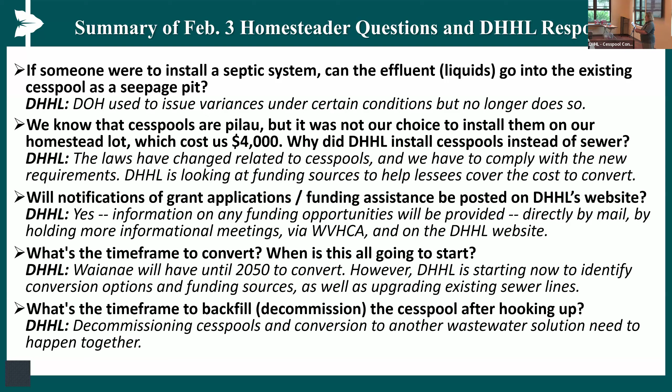So let's go to the next slide. There were some questions about process. We are going to try to get you that information, but we intend to manage the entire process so you folks don't have to deal with it individually on each of your lots. That's kind of the idea of doing the whole homestead together. We don't want you to get fined or anything like that - it's really DHHL's responsibility as the landowner.

As far as extending sewer lines, the idea is we're going to be accessing state revolving fund monies, hopefully. We're looking at a lot of different sources, but DHHL is probably going to run that project. We're also looking at extending the laterals to your lot and connecting your houses, so all you folks will have to do after that is maintain your lateral - if it clogs up, you've got to figure out how to unclog it.

Next slide. We really do want those 37 lessees to come into the tent and be part of this project. We want to make sure everyone gets assistance with this. We are looking at low pressure sewer systems, but those grinder pumps can last up to 20 years if you take care of them. We also know that the wastewater treatment plant does have capacity to add everyone who can be added to the city's sewer system.

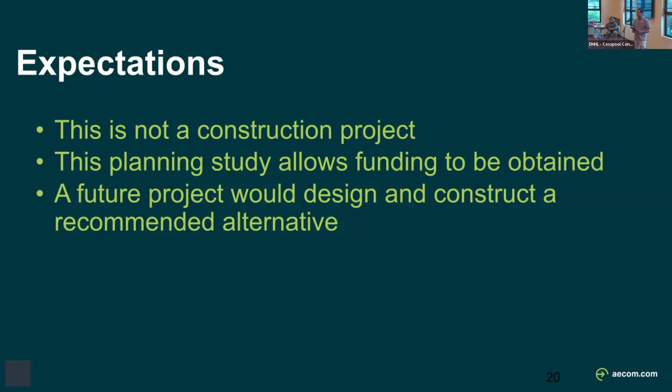It'll be a future project to design and construct it, once the funding is obtained. So I'd love to be involved in that, but for now, it's just figuring out the path.

Let's talk through the timeline. We're looking to do this all in about a year's time, roughly. So we're kind of early on in it right now. We started with a site visit in early April, and now here we are at the first community meeting.

We'll be putting together the alternatives analysis and preliminary engineering report. That's the study, the draft of it by August. So it'll be in mid-August, we'll have a report. Sometime after that in August, we'd like to get together, have another meeting, share the findings with you folks, hear what you think.

And then we'll consider all that, wrap it up into the report, and have a final report by October. And if everybody's up for it, we'd be happy to do another community meeting.

From there, DHHL will have a concept of what the project looks like. They'll have an idea of the costs, and then they'll work together with DOH to submit that for a funding application.

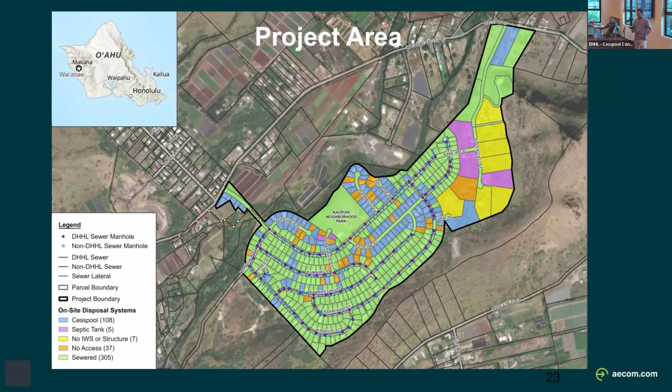So what you also see is that there's a lot of existing sewers that are already within the community, but we know there are some roads or some homes that are not served by any sewers. If they were already there, you could just simply connect to them, but there's quite a cost to install new ones. Does it make sense instead that those folks would do a septic tank or something like that? That's what we're evaluating. But yeah, this is the project area for this evaluation.

Okay, now we got a video that UH put together that we'll share with you folks.

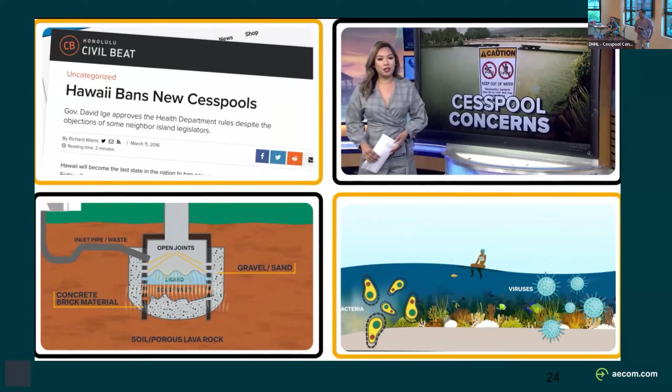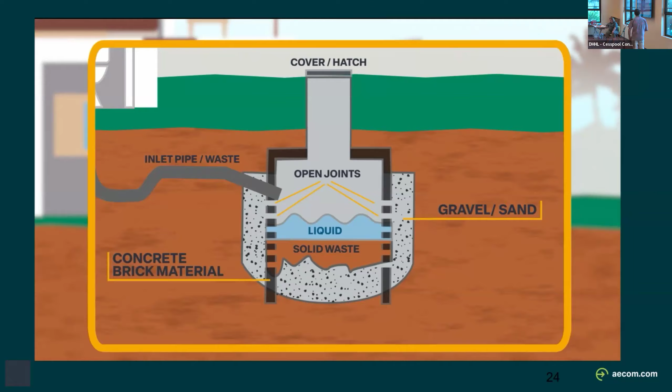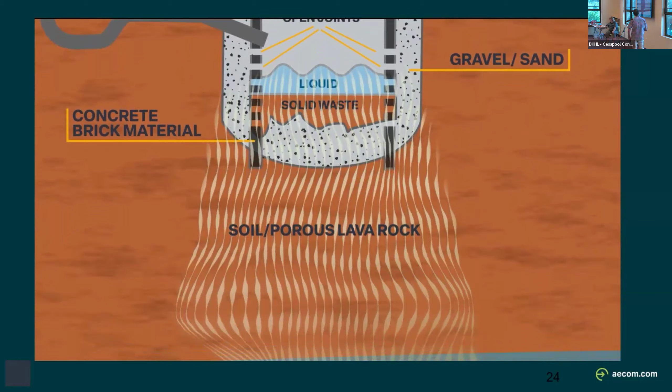Cesspool construction was recently banned in Hawaii. But what is a cesspool and what problems do they cause? A cesspool is basically a covered hole in the ground. It is sometimes lined with brick or concrete. Open joints in the lining allow liquid and solid waste to seep through. Cesspools are designed to dispose of waste, but not to treat it. If you have a cesspool, when you flush your toilet, use your kitchen sink, take a shower, or do laundry, untreated wastewater and gray water is directed into this hole underground. Human waste moves away from the cesspool through Hawaii's porous lava rock. Eventually, it reaches the water underground and contaminates it with dangerous pathogens and household chemicals.

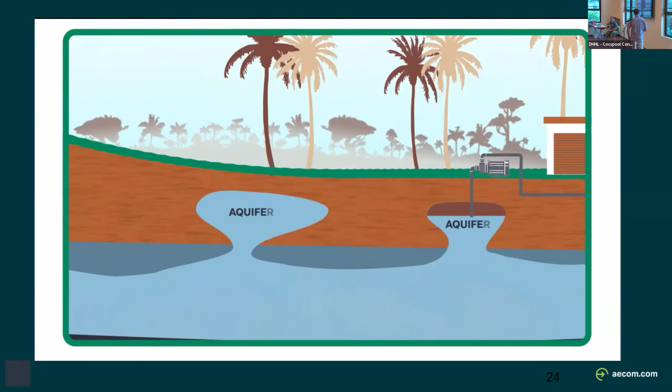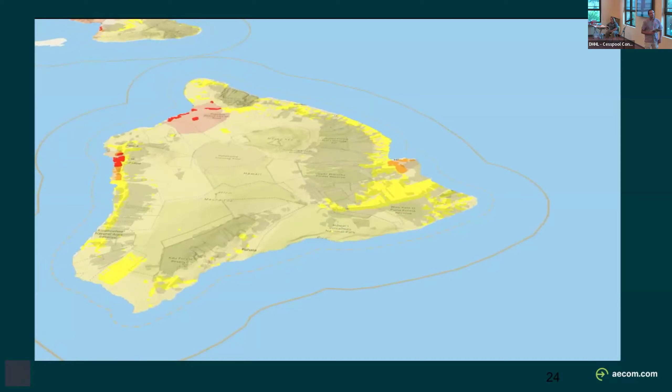Because we live on islands, everything is interconnected. We rely on underground aquifers for our drinking water. Water from these aquifers is also connected to the ocean through a process called submarine groundwater discharge. When pollution from cesspools travels in water underground, it impairs our drinking water sources and negatively impacts our ocean ecosystems. Human waste contains viruses and bacteria that can make us sick if we consume water contaminated with them. Our waste naturally contains nutrients like nitrogen that can wreak havoc on coral reefs by causing algal blooms. The medications we take and personal care products we use can also negatively impact Hawaii's plants and animals. Hawaii has over 88,000 cesspools that contribute an estimated 53 million gallons of raw sewage into our environment every day.

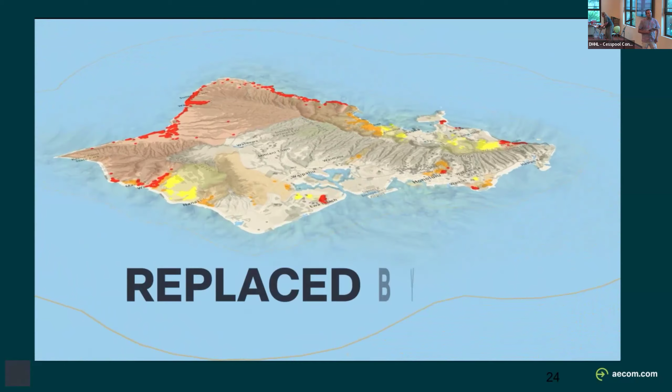Because of these impacts, cesspools are required to be replaced with more effective forms of wastewater treatment by 2050. To continue to protect our health, that of our loved ones, and of our environment, cesspools need to be upgraded as soon as possible. For more information on cesspools in your neighborhood, visit

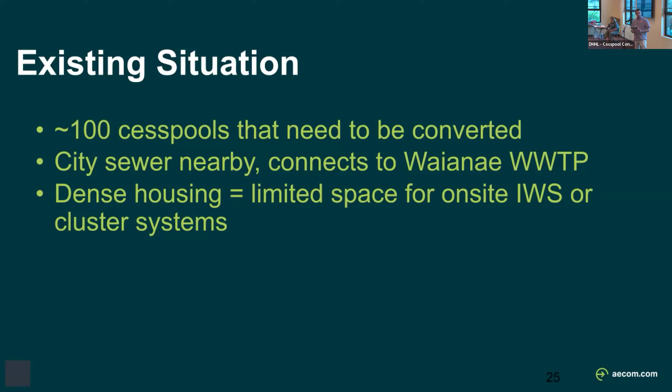So got another map that can kind of, it doesn't show up too good on there, but kind of point out some of the... thank you. All right.

Yeah, so here's basically the whole outline of the community. Puhinalo Place, Ko'olina Street, the ag lots are up here, and then Waianae Valley Road is right here. The blue lines show the existing sewers, and the orange dots show the cesspools. So really the folks that are already connected to these existing sewers, nothing is really going to change for those folks. Really, it's these areas in here where there is no sewer and there's cesspools. That's what we're evaluating, is what do we do for those areas.

So there's an 8-inch, these are all 8-inch sewers, which is good, typical capacity. Then eventually it connects to this 16-inch sewer, which is owned by the city. So then it cuts behind these few homes right here. I think right now there's like a construction trailer over there and a sign for the sewer project that's going on. So it cuts back behind there, and then it reconnects to Waianae Valley Road and goes down from there and flows to the treatment plant, where then it's treated. I didn't put a nice picture of the treatment plant on there, but it's treated at the plant and it discharges through a deep ocean outfall after going through secondary treatment.

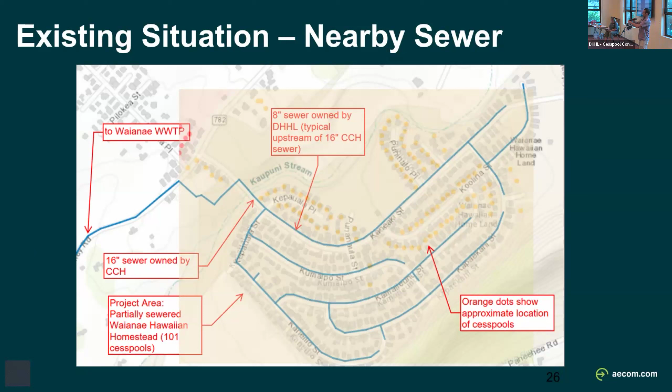So yeah, we're trying to determine how best do we convert all these cesspools in a way that's affordable to you folks, affordable to the owners too, like DHHL, and ultimately the city. The city will be on the hook eventually to maintain these sewers. So it's got to be something that's not going to put a burden on them. It's going to put some burden on them, but we got to balance the burden.

It needs to be acceptable to the community. You probably don't want a sewer going right through your front yard or something like that, right? We don't want to knock down your rock wall to build a sewer, those kind of things we're avoiding. It needs to meet the environmental requirements, those defined by the Department of Health. It needs to be achievable—something we can afford, something we can build, something contractors know how to build. It has to be something everybody is comfortable maintaining. And it's got to be proven. We're not looking to try something new that's never been done before. We need to do something that's proven. So that's kind of what's in the back of our mind as we go through this and evaluate the options.

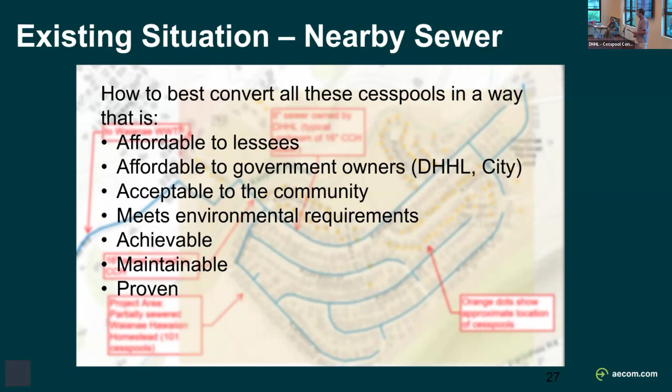So there's sort of four main concepts that we're looking at. Ultimately, it'll probably be a combination of these depending on the different layout of the streets. Some streets slope down, some slope up. Some properties are bigger, some are smaller. So it'll likely be a combination of these, but we'll walk through kind of what is entailed for each of these concepts here. So the first one is just the traditional gravity sewer.

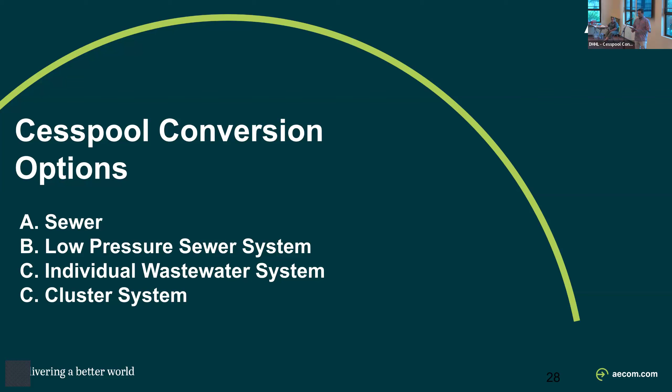So what I want to do is, as we go through each of these, describe who is responsible for which piece of it, how it's laid out in your yard, and who's responsible for what.

So for the gravity sewer, it starts at your home. You have a lateral, whether you have a sewer, a cesspool, or a septic tank. That's the pipe that leaves your house and goes to wherever it's going. That's your responsibility to maintain. If it gets a clog, it's up to you to clear it or call the plumber. DHHL won't be able to really help with that.

But the sewer main, the sewer that's out in the road, and any pump stations, that'll be the responsibility of DHHL. Ultimately, the idea is that the city wants to take it over, but DHHL will build the project to the city's standards. When we show the city that it was built the way they want it, then they'll take it.

Sewer bill. If it's a gravity sewer, unfortunately there's a sewer bill that goes along with that. I wanted to ask, who here pays a sewer bill? If everybody has cesspool or septic, then nobody does, but I'm sorry to single you out, Jan. Oh gosh, didn't mean to do that. I thought maybe there'd be some folks connected to the sewer too, but yeah, I get that. Who wants to start paying a sewer bill if you don't already pay one, right?

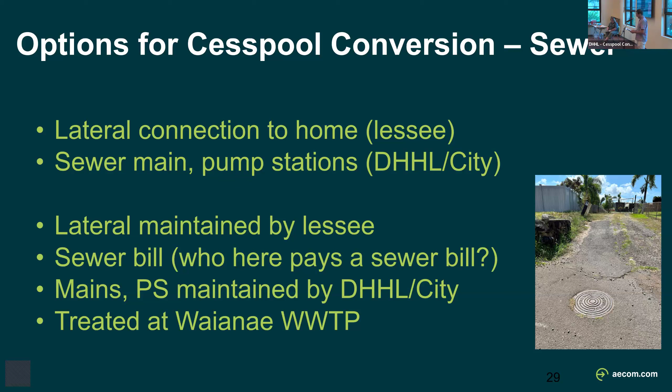And then once it gets out into the road, it's the responsibility of DHHL or ultimately the city. But it flows downhill, so the sewer takes advantage of gravity and flows downhill through the pipe.

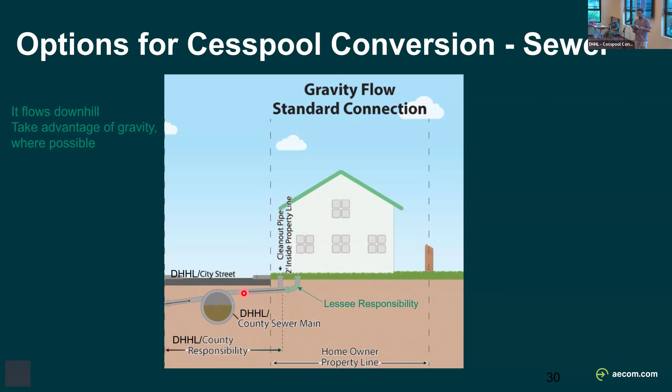All right, the next alternative or option is low pressure sewer system, we also call it LPSS. That starts from a lateral connection at the home, same thing, the pipe coming out of your home flows by gravity until it gets to a grinder pump.

So the grinder pump would be in your yard. The top of it would look like the top of a septic tank or maybe a cesspool. Usually it's a green cover about this big around, and it's in a pit that's maybe this deep or so, and it's a pump that's basically like a sump.

As that fills up, it'll kick on a control to turn on the pump, and the pump will pump it out to the road. The reason you would do that is if your house is lower than the sewer that's in the street. Usually that's not the case, but I know there are some homes in the community that look like they might be like that, especially if there's an Ohana unit in the back that's kind of sloped down, you might need that pump to get up to the road.

So from the pump, there's a pressurized pipe, usually PVC, and it would connect to the sewer main in the street. That pressurized main and the sewer mains, that would all be the responsibility of DHHL and the city.

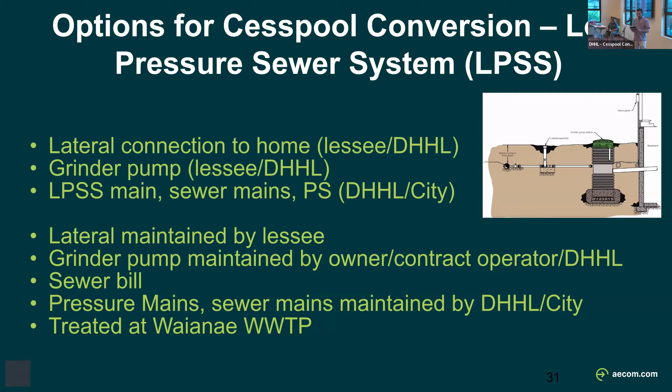All right, go to the next slide please. There's a little diagram that shows... okay. So here's the home, here's the lateral, just like everybody has coming out of their house, and where it would normally connect into the cesspool. Instead, it connects into the grinder pump and tank, this green box right here.

Notice, like I was describing, you would really only do this when your house is lower than the road. If your house is lower than the road, and say the sewer is up here, it couldn't flow by gravity on its own because it would go down below the main. So it pumps it up high, and then it lets it flow by gravity. So you'd be responsible for this, but maybe you'd have support from a plumbing contractor, or DHHL may manage that whole thing. We're not sure.

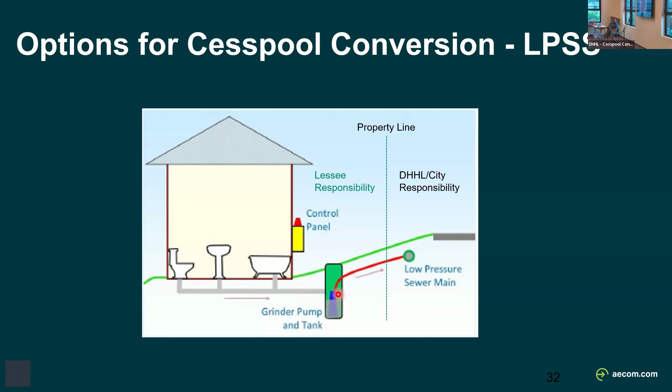But once it gets out to the road, it's not your responsibility anymore. It would be DHHL or the cities.

And here's some photos of what it would look like. So there's the cap of it. The pump would be right in there under that cap. And then right up, usually against your house or maybe next to it on some unistrut, there'd be a little control panel - the electrical connection and control panel.

So pretty low energy usage. I ran the numbers on what it was. It was pretty minor electrical for the year - I want to say maybe it was like $50 for the year or something to run it.

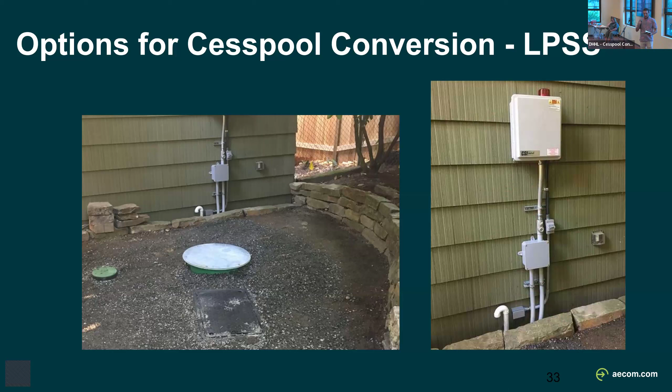All right, so we can go to the next one, which is individual wastewater system. This is basically a septic tank, or it could be something more high tech than that, like an aerobic treatment unit. But just like all the other alternatives, it starts with the lateral connection to the home, which is yours. And then it would connect into the septic tank or aerobic treatment unit. A septic tank is really just a tank that separates the solids from the liquids, whereas the aerobic treatment unit has a little compressor that blows compressed air down into there, and that provides treatment, believe it or not.

And after it leaves that tank, it then goes to a leach field. And the leach field distributes it underground in your yard and allows, another thing that's pretty wild, it allows microbes in the soil to break down the waste.

So cost-wise, ballpark 30,000 to 70,000 per septic improvement. It's a big cost. And like Nancy said, we're trying to get funding to do everything so that you folks don't have to pay for that. But normally if somebody does it, they have to pay for it.

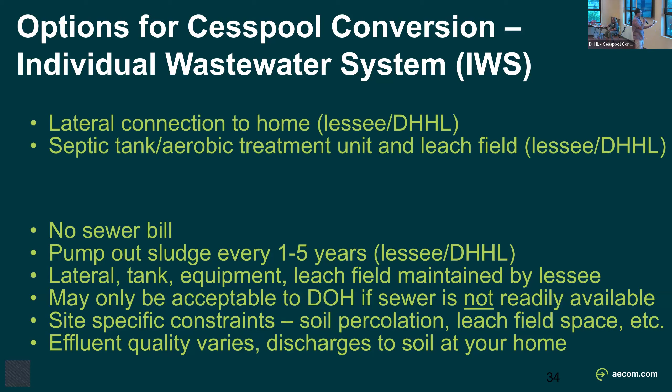So I've got a photo, an image figure of a septic tank here. Let's go to this side. All right, so here's the septic tank, here's the top of your yard. These two green caps allow maintenance - they're openings for maintenance - but the flow from your house, the sewage, goes into this pipe and drops into the tank. Now the tank is separated into two sides here, and there's a gap in the middle that allows the liquid to pass through.

But this left side holds the solids. They settle down to the bottom, and grease and scum floats up to the top and is held there. So this is what needs to get pumped out every so often. But the liquid, as it fills up, goes over to this other chamber and then goes up through this pipe and out into your yard to the leach field. That's how the septic tank works. But that's really just the first step of it. The next step, maybe even more important or just as important, is the leach field.

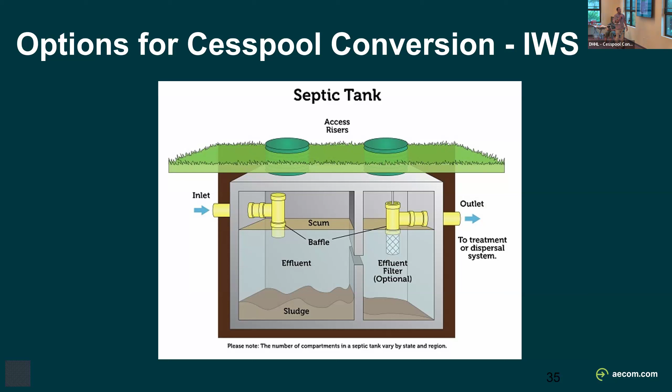We could go to the next slide. All right, so this is a picture of a leach field, I think this is on Hawaii Island. This is the tank that was just shown in that last picture. So the pipe would come in, connect to this side of the tank. The solids would settle out there, and the scum, grease, and liquid would go over to this side, and then it would discharge into this leach field right here. So it disperses it into this soil. If you have good soil, you can use what's there. If you don't have good soil, then you have to bring in particular soil that has the right properties.

The size of this is a pretty big thing. I wonder if we have Michael - I wonder if you click one time if the dimensions will pop up. Didn't make it on there. Yeah, so the dimensions of this leach field are roughly 30 feet by 30 feet, something like that. And this one is more around 15 this way, and I want to say it's something like 8 or so that way. So it's kind of big, you know. If you're on the ag lots up there, they have space for it, but if you have a small lot, there's really probably not enough space for it.

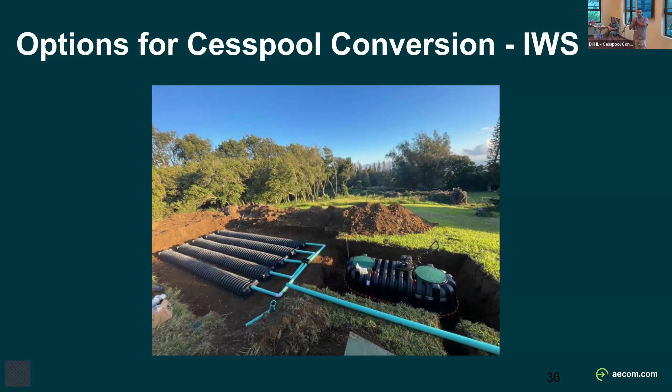All right, and then the last option is the cluster option. So it's like all of them combined. It starts with the lateral at your home. Often it goes to a septic tank, same one that I just described, to separate the solids out. Then it needs to go somewhere for treatment, so it's going to use either sewers or a low pressure system, which DHHL would be responsible for. And then it would go to some small treatment plant, or maybe some aerobic treatment unit or something like that - that would be DHHL's responsibility. And then it would go out to some kind of a large leach field for disposal or water reuse.

But it would be shared. So that leach field that I just showed before was for one house. This would be multiplied, so everybody would kind of be tied into the same leach field.

So you'd have a sewer bill, but it probably wouldn't be a city sewer bill. It would probably be through DHHL or through a contract. You would be responsible for the lateral, just like all of the options. The sewer, the treatment, the disposal, a water reuse system, all that would be DHHL or a contract operator.

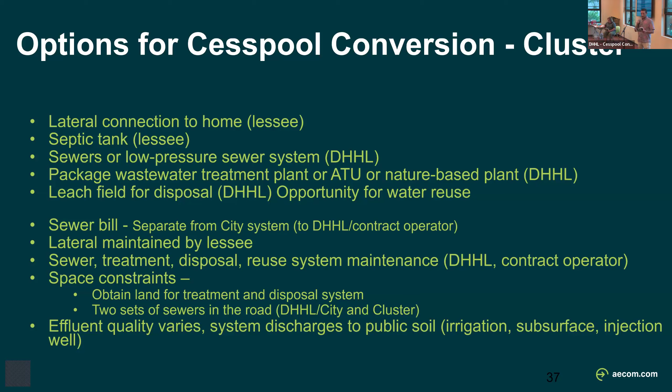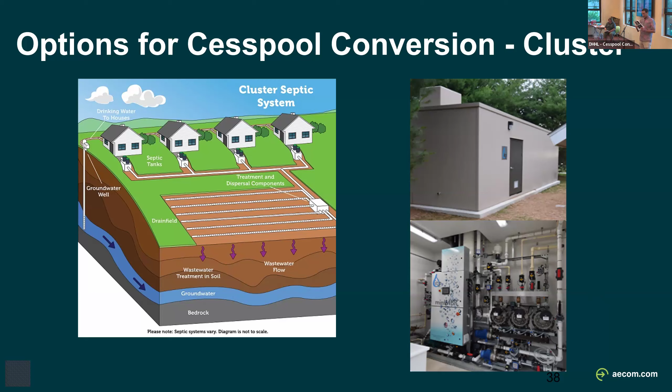I don't even see any closed eyes yet, so thank you.

The key things to consider is who's going to own the different pieces of this infrastructure. Is it going to be DHHL? Is it going to be the city? Is it going to be the folks in the community? Where are those lines of demarcation? Who owns and who operates what? Which we have pretty good ideas of where those lines of demarcation should be.

Maintenance costs and who pays them. We don't want the community to get strapped with unreasonable maintenance costs. So those will all be included in the report.

Who's going to operate the system? Is it going to be the city? Is it going to be a contractor? Is there space to put this stuff? A little bit of a broken record on that one, but in Hawaii, that's always the hardest thing, is where do we fit stuff? Is it allowed by law?

We need to develop these alternatives in accordance with the Department of Health. I know Destin has had his nose in the rules and regulations for the last few months. And then lastly, what does the community ultimately want? We want to take into account what you want, what you don't want, knowing that we're never going to make everybody happy, but we need to do our best.